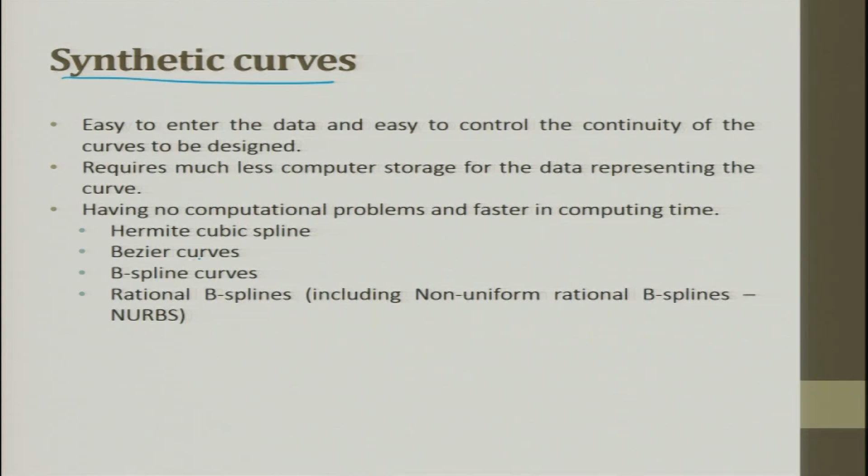Having no computational problem and being faster in computing time, we have the Hermite cubic spline, Bezier curve, B-spline, and rational B-spline curves coming into existence.

Hermite cubic spline is a more general form of curve that can be defined through a set of vertices points. This can be represented by a set of vertices points. A spline is a piecewise parametric representation, and it represents the geometry of a curve with a specified level of parametric continuity.

The moment I said cubic, it is of the third order. Each segment of the Hermite cubic spline is approximated by a parametric cubic polynomial to maintain C2 continuity. I will leave it to you to read, or I will share a reading material about C0, C1, and C2 continuity, so you can appreciate what C2 continuity means.

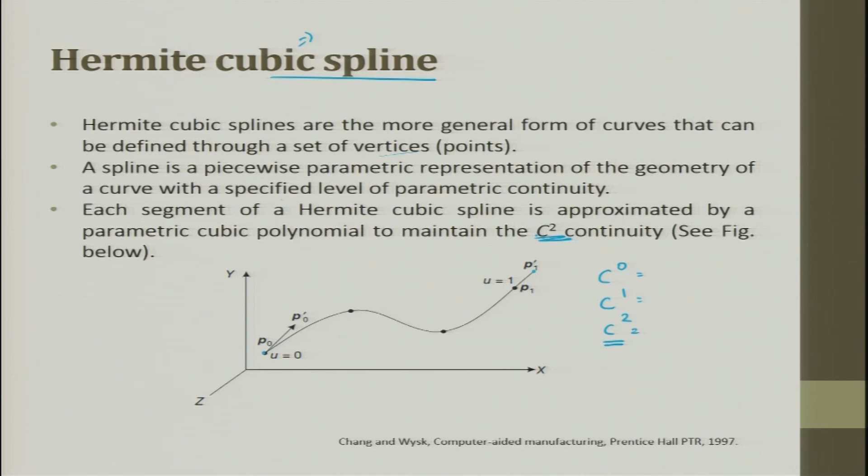The parametric equation of a Hermite cubic spline is given by P(u), which is a summation of Ci*Ui, where U takes the value from 0 to 1. In an expanded form, the same equation can be represented like this, where U is a parameter and Ci is a polynomial coefficient. If you wanted to work in a simple, algebraic, or longhand form, this is how we take it.

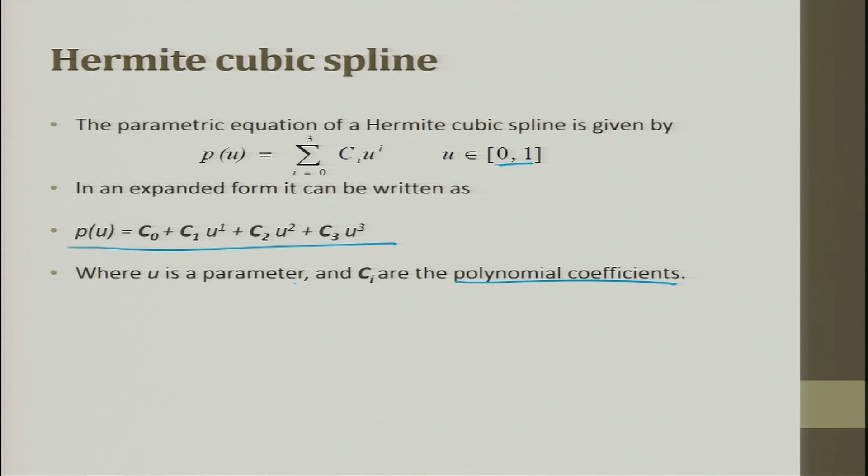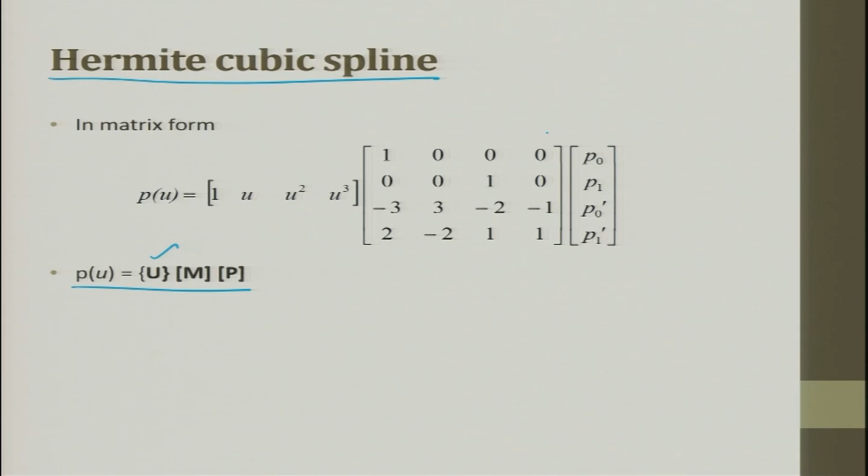But in computers, what we do is always try to convert this into matrix form. Generally the Hermite cubic spline is expressed in matrices, where 1, u, u square, u cube are the u values taken, this is the coefficient Cij, and these are the points.

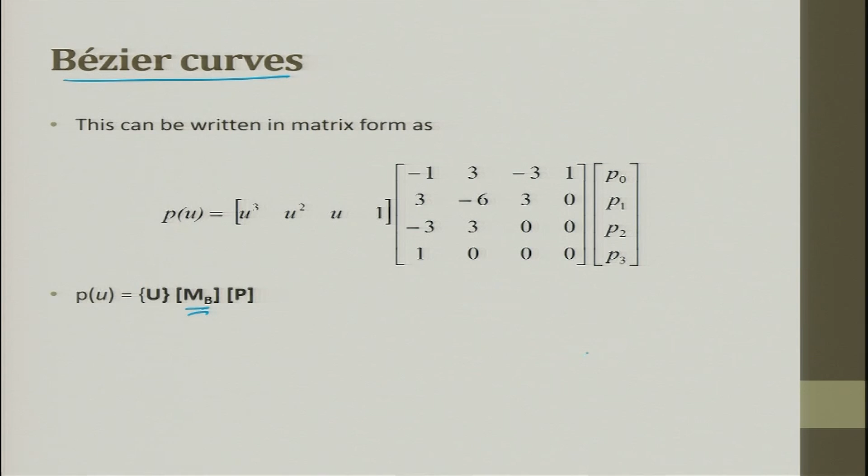In Bezier, what happens is you can express the same thing in matrix form. You can see here the Bezier matrix, these are the points, and these are the u values which are there.

Bezier curve properties: the Bezier curve passes through the first and last control point while maintaining proximity to the intermediate control points. As such, the entire Bezier curve lies in the interior of the convex hull of the control points—this is what we study in mathematics as concave and convex hull. If a control point is moved, the entire curve moves. Being a polynomial function, Bezier curves are easily computed and infinitely differentiable.

You can split the curve. If the control points of the Bezier curve are transformed, the curve moves to the corresponding new coordinate frame without changing its shape.

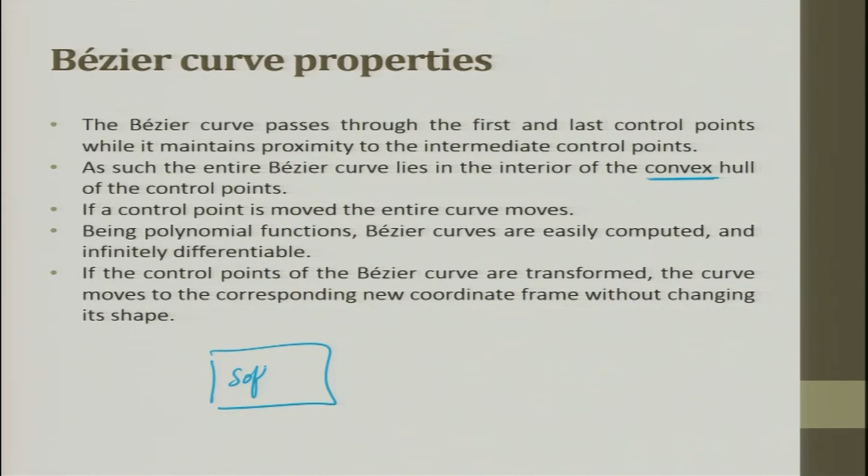This gives you the freedom of transferring it from one software to another without any difficulty. Or you have a user coordinate system and a world coordinate system—from the world you go to a user coordinate system, from one user coordinate system you go to another. The object whatever you have created will be shifted without any deformation or change.

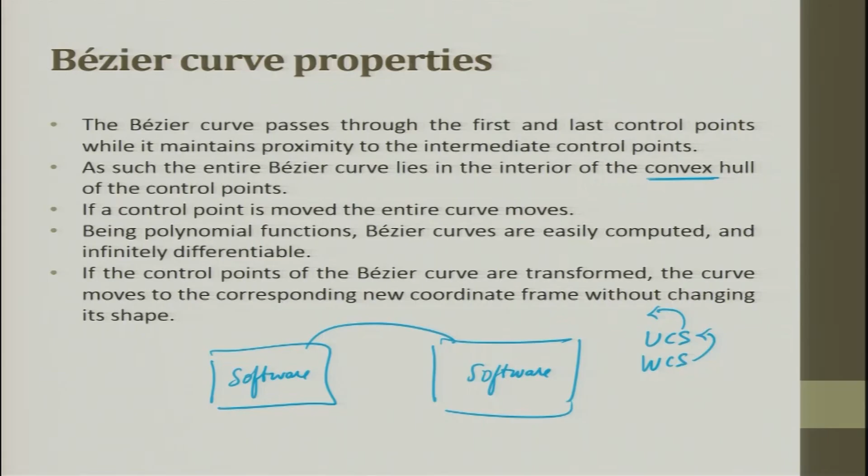B-spline can be of any degree, but in computer graphics a degree of 2 or 3 is generally found to be sufficient. You can go to the nth degree, but you will have more data, and when you have more data you will also have more errors coming here and there. So it is better to stop with 2 and 3, which also makes it computationally a little easier.

The B-spline curve has the flexibility of choosing the degree of the curve irrespective of the number of control points. With 4 control points, it is possible to get a cubic Bezier curve, while with a B-spline curve one can get a linear, quadratic, or cubic curve. A B-spline can also use the basis function or blending function in the equation to arrive at this form.

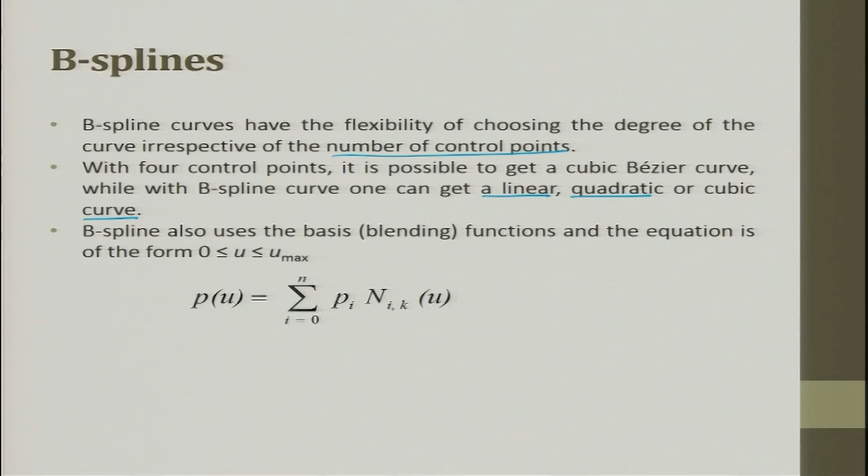The B-spline properties. The plotting of a B-spline curve is done by varying the parameter u over a range of knot values. The knot vector adds flexibility to the curve and provides better control of its shape.

The partitioning of unity for any knot span ui and ui plus 1 gives you this. The positivity is this value. This is how it is represented.

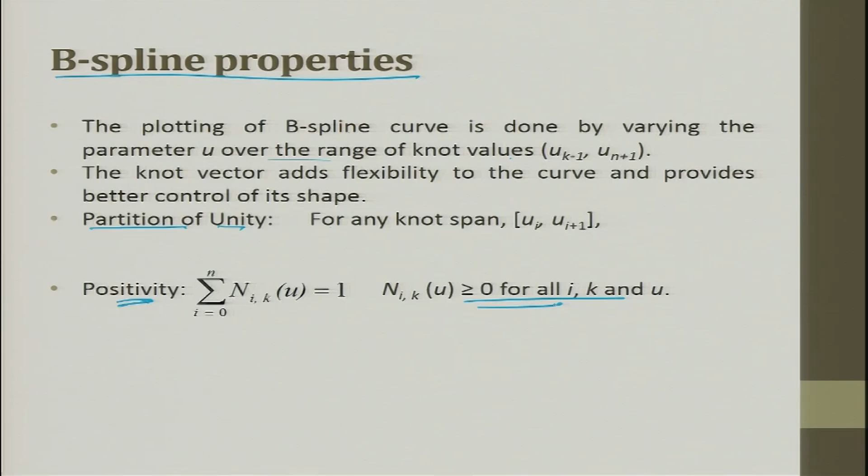The curve follows the shape of the control points and lies in the convex hull of the control points. The entire B-spline curve can be affinely transformed by transforming the control points and redrawing the curve from the transformed points. B-spline exhibits a lot of local control which is not there in Bezier.

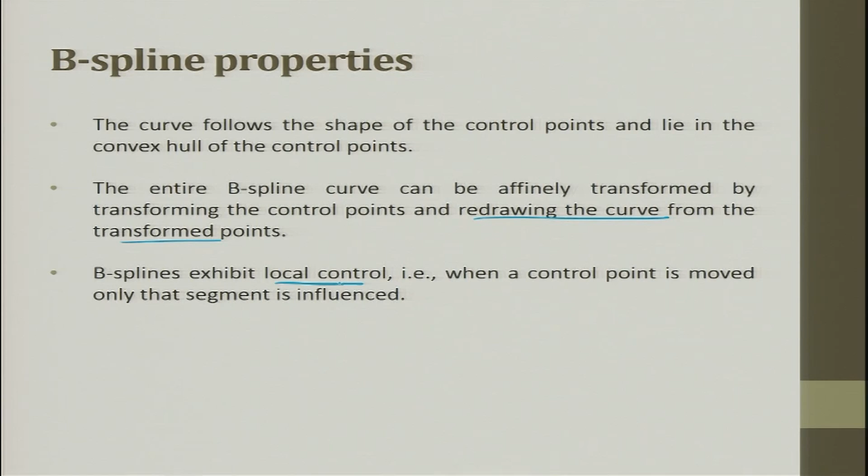The B-spline properties for CAD. The local control can be achieved by changing the position of the control points. You are now getting into fragmenting the curve and moving each individual fragment.

The B-spline curve tightens by increasing its degree. As the degree of the B-spline is lowered, it becomes closer to the control polygon.

If k is equal to n plus 1, then the resulting B-spline curve is a Bezier curve. If k is n plus 1, then the resulting B-spline is a Bezier. If the B-spline curve is contained within a convex hull of its control points, then this is very important.

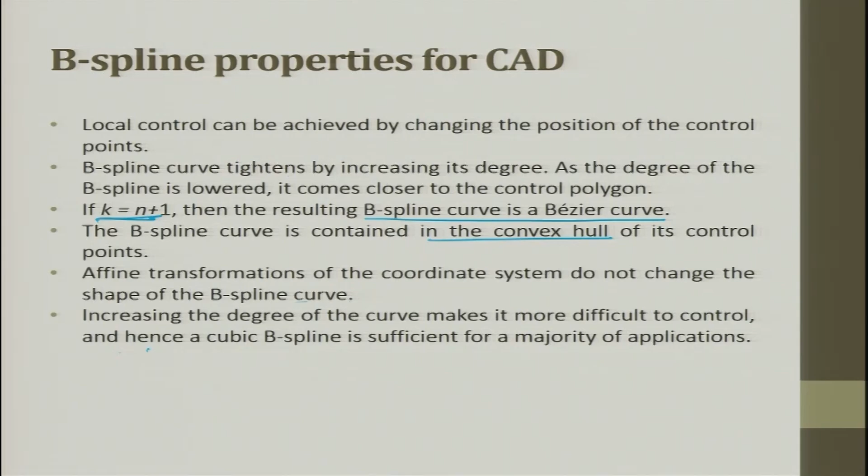Affine transformation of the coordinate system does not change the shape of a B-spline curve. Increasing the degree of the curve makes it difficult to control, hence cubic B-spline is sufficient enough to do the majority of applications. So now what is happening?

We found out that B-spline also has some difficulty. In order to get out of the difficulty, we went to rational curves. A rational curve utilizes the algebraic ratio of two polynomials. They are important in CAD because of their invariance when geometric transformations are applied.

This point is very, very important. This brings a difference, or the advantage of rational curves over B-spline. Rational curves get this advantage.

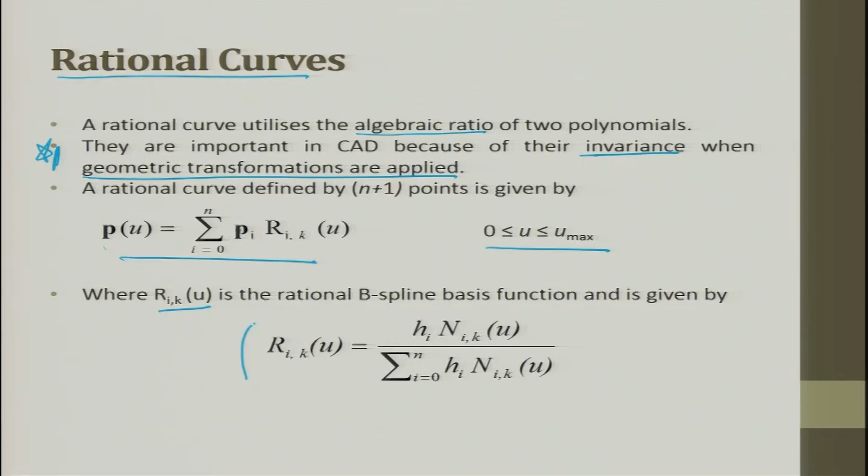The rational curves defined by n plus 1 points is given by P(u) in this form, where u takes a value between u max, where R ik is a rational B-spline basis function, and it is given by this function.

The uniform cubic B-splines are curves with the parametric intervals defined at equal length. The most common scheme used in all CAD systems is the non-uniform rational B-spline, allowing a non-uniform knot vector.

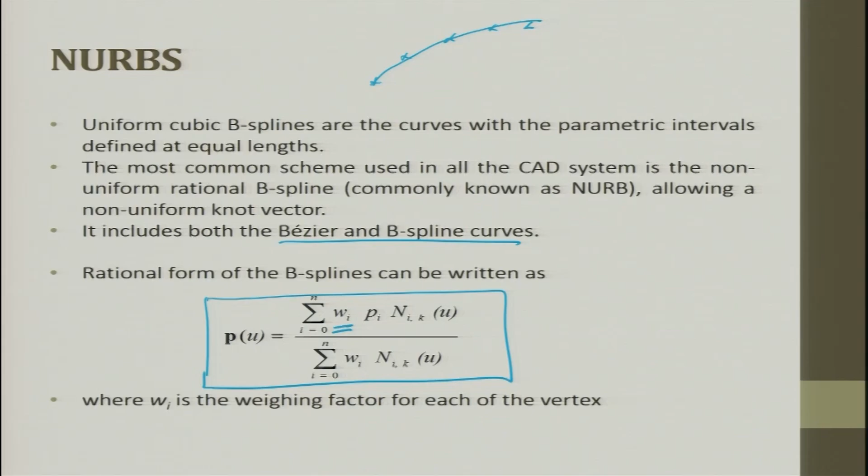It includes both Bezier and B-spline in NURBS. So the rational form of B-spline can be written in this form, where W are the weightages. So it gives you more freedom for locally changing the curves.

NURBS have all B-spline surface abilities. In addition, they overcome the limitation of B-spline surfaces by associating each control point with a weight. Uniform representation of a large variety of curves and surfaces can be done by using NURBS.

NURBS are invariant during geometric transformation as well as projections. NURBS is flexible for designing a large variety of shapes by manipulating the control points and the weights.

The weights in the NURBS data structure determine the amount of surface deflection towards and away from the control points. It makes it possible to create curves that are true conic sections.

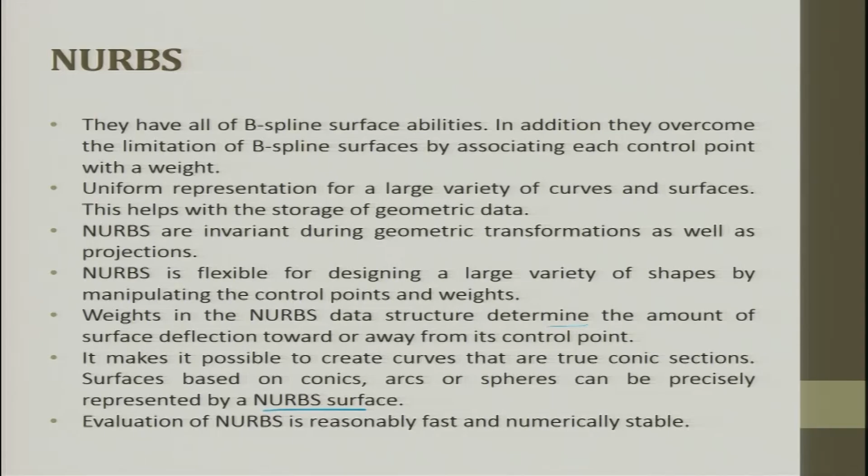Surfaces based on conics, arcs and spheres can be precisely represented by NURBS. So more and more flexibility is given for the curves such that you can try to make it free form curves. So the evaluation of NURBS is reasonably faster and numerically stable.

A number of facilities available in NURBS, such as knot insertion, refinement, removal, degree elevation, and splitting, make it more and more flexible through the design process.

NURB surfaces can be incorporated into existing solid models by stitching the NURB surface to a solid. So if you want to add a patch to the solid surface, it is possible.

Reverse engineering is heavily dependent on NURBS, wherein you have a point cloud data.

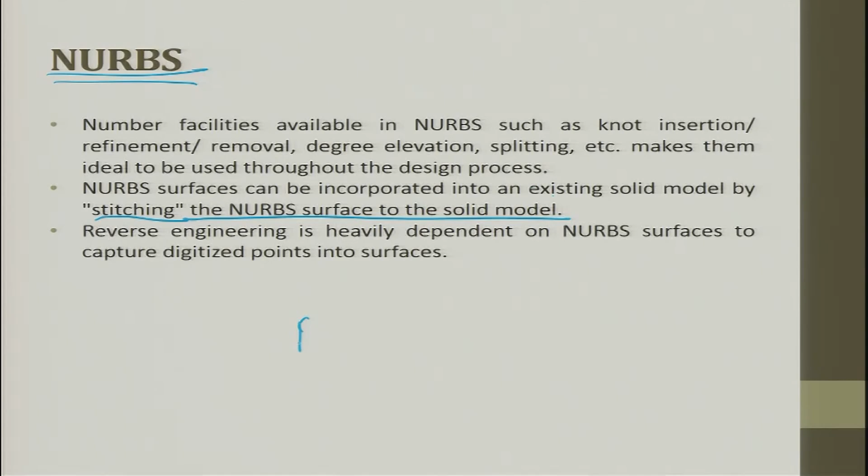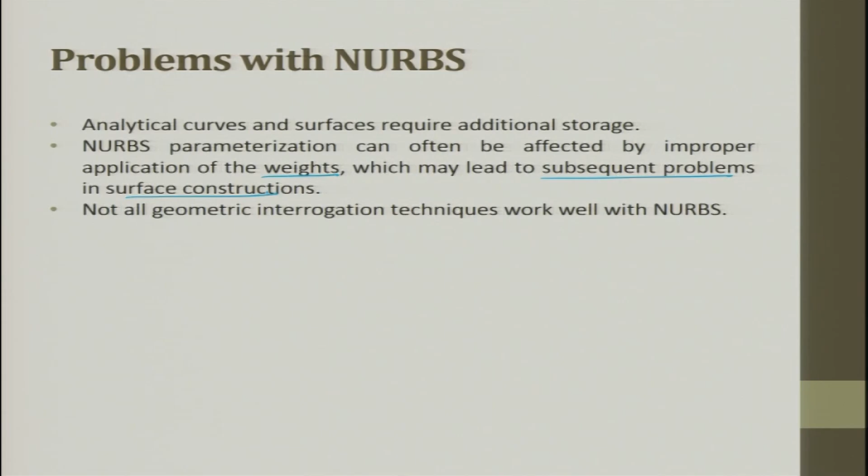The problem with NURBS is that analytical curves and surfaces require additional storage. NURBS parameterization can often be affected by improper application of weightages, which can lead to subsequent problems in surface construction. Not all geometric interrogation techniques work very well with NURBS, so NURBS also has its own difficulties.

When we talk about solids, all these things we discussed were 2D synthetic curves. When we talk about solid models, there are 6 different varieties. The most common one is boundary representation.

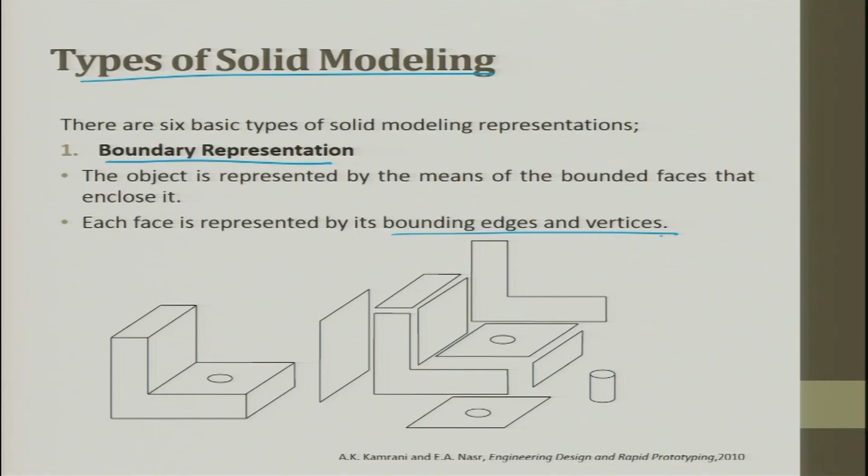The solid is divided into several boundaries, and each boundary is stored. The object is represented by means of a bounded face that is enclosed. This solid is bound by each boundary, and when you want to do fluid analysis, boundary representation is very important. Each face is represented by its bounding edges and vertices, so an object is split into several boundaries.

Next is constructive solid geometry, which we discussed. It is the representation by an order tree following a Boolean operation, through which you try to get the solid model. Non-terminal nodes represent Boolean operations such as regularized union, intersection or difference, while the terminal nodes represent a primitive solid and the transformation data.

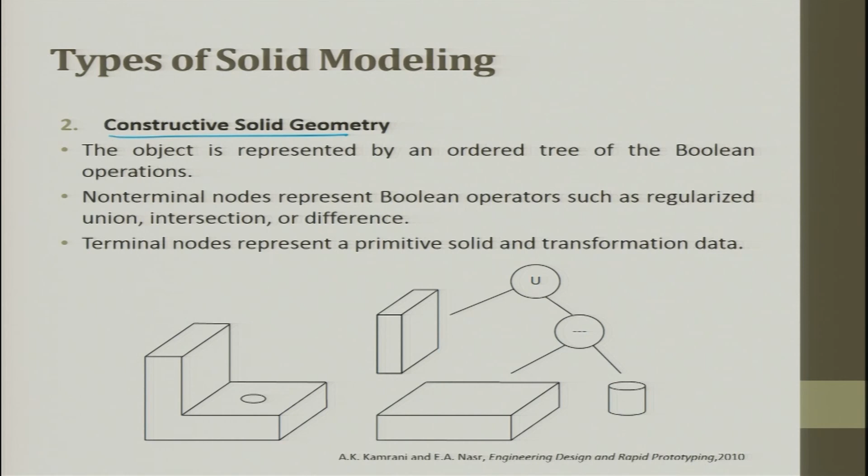The solid can be drawn through constructive solid geometry, but it is not a unique way. There are several ways to use Boolean operations to represent a solid. The third method is cell decomposition.

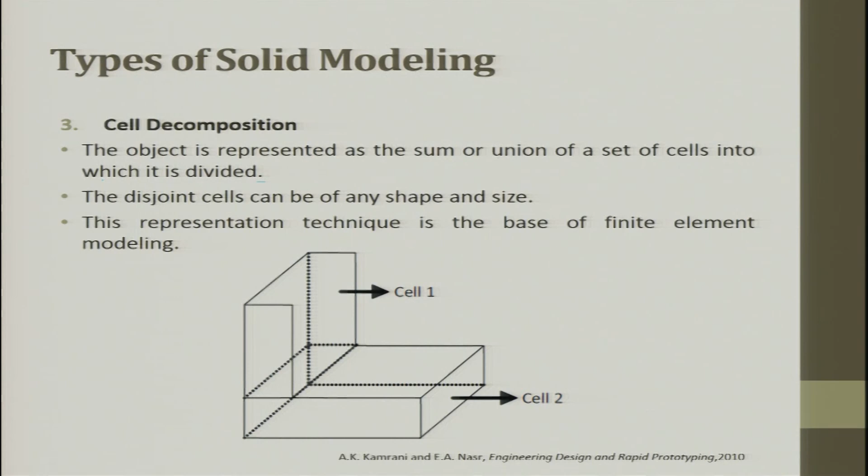The object is represented as a sum or union of a set of cells into which it is divided. Each disjoint cell can be of any shape and size. This representing technique is the base of finite element modeling, so cells used in finite element analysis mean the cell decomposition method is also exhaustively used.

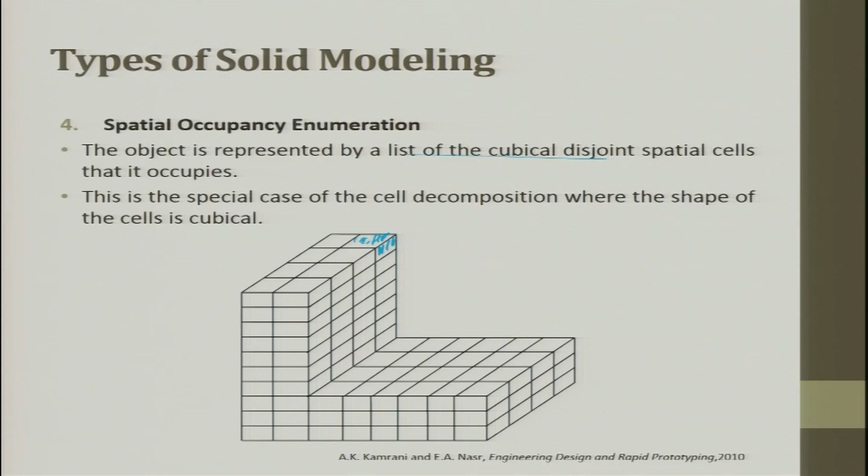Spatial occupancy enumeration represents the object by a list of cubical disjoint spaces. This is a special case of cell decomposition, where the shape of the cell is cuboidal, though you can also have other shapes. This way of representing a solid is called spatial occupancy.

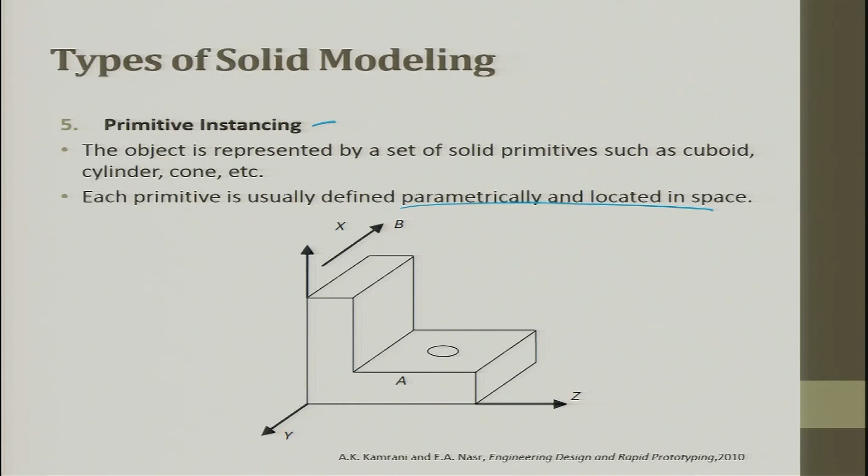Then there is primitive instancing. The object is represented by a set of solid primitives such as cuboids, cylinders, cones, etc. Each primitive is usually defined parametrically and located in space. This becomes easier since representing a cube in parametric form is easy - I take a primitive with respect to parametric form, and then join it to get a shape.

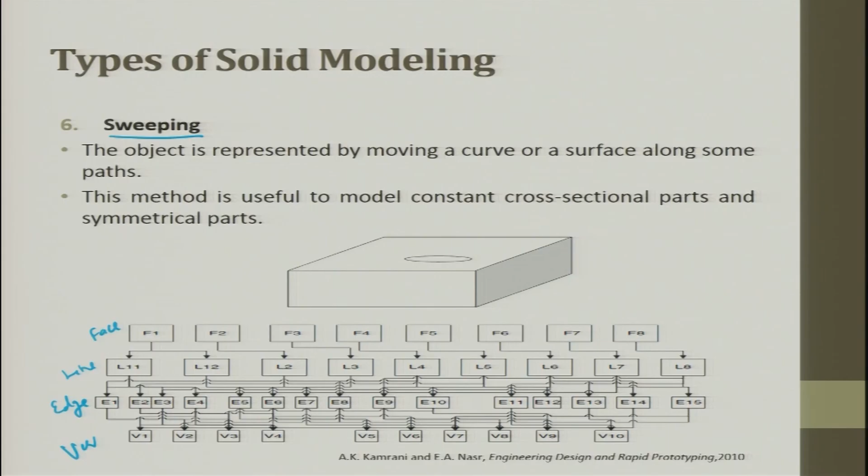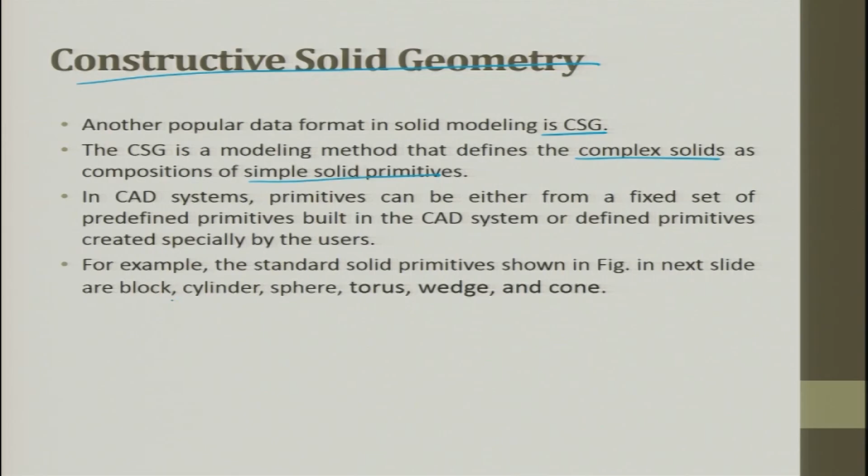So all these 6 methods are used to represent a solid. Constructive solid geometry, otherwise called CSG, is a modeling method that defines complex solid shapes as a composition of simple solid primitives, which were already discussed in the previous lectures. I have also listed them out here.

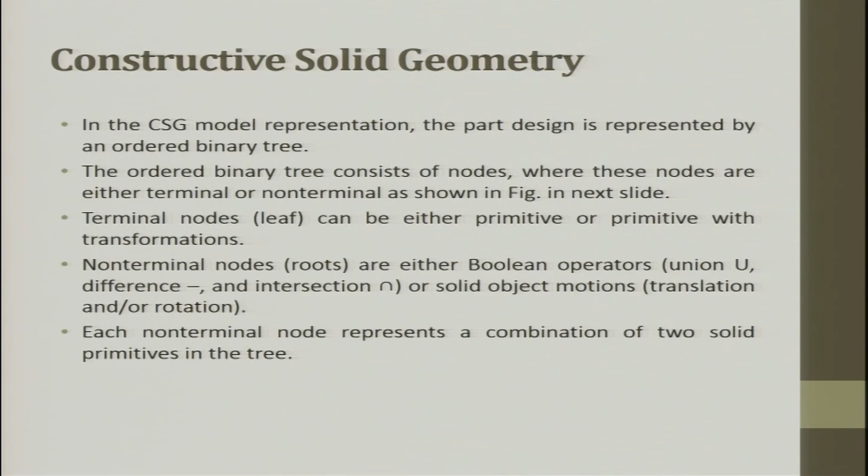The terminal nodes can be either a primitive or a primitive with transformation. Non-terminal nodes are either a Boolean operation or a solid object motion. So each non-terminal node represents a combination of two solid primitives in trees.

The last one is feature recognition and design. Feature recognition involves the identification and grouping of feature entities through a geometric model. Such post-definition of features can be done interactively or automatically. As soon as the CAD model is drawn, the feature extraction is done - identifying entities are extracted from the model, and additional engineering information such as tolerance and non-geometric attributes are then associated with the feature entity.

So it quickly goes, there is a template, it identifies what features are the same, and then starts processing. Suppose hair is there, so all predefined features are already available. So it splits the full CAD model once it sees it, divides it into several features. Each feature recognition is one step, and extraction is two. Recognition and extraction go back and forth. Recognition is based on features like eye, nose, mouth, hair.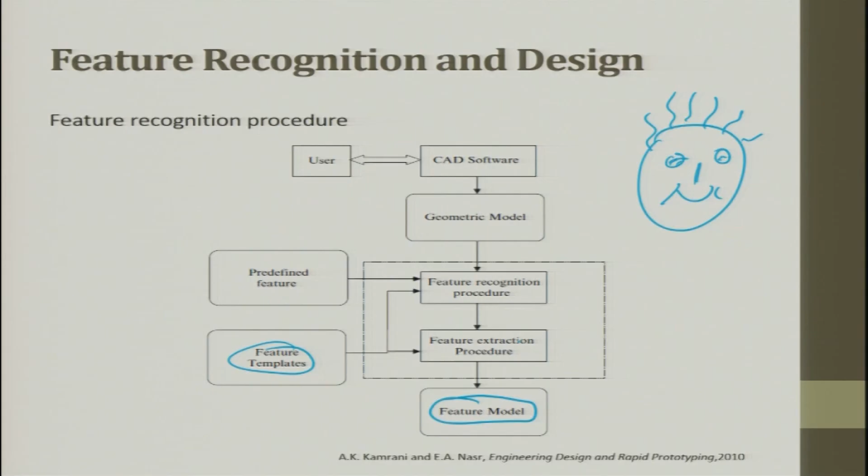Template feature extraction procedures are there, so we do it, and finally we get a feature model. The feature based model, or design by feature, uses 2D or 3D features as design primitives on the product model. The use of features provides a more natural interface between design and solid modeling. In mechanical design, for example, a designer can work directly with high level entities such as a pocket, rather than associated low level entities in which vertices and edges form a pocket.

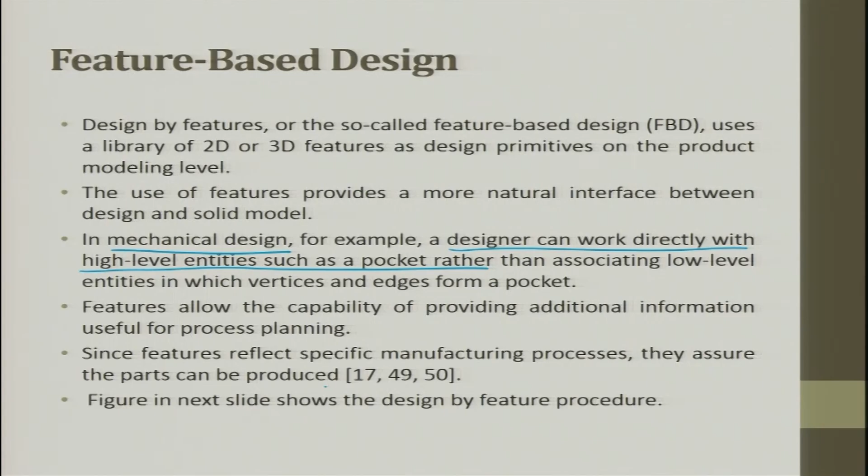So in mechanical design, the designer can work directly with the high level entity as a pocket, in terms of a face rather than curves and lines. The feature allows the capability of providing additional information useful for planning. Since features reflect specific manufacturing processes, they assure the part can be produced. So in feature based design, you have a CAD software, geometric model, and feature model. You pick features from the feature library, which is connected to a process library, to see what is going on.

The integration of design by feature and feature recognition is applicable for design and manufacturing integration. The user can create a context dependent representation that is specific and informative enough to satisfy the required application. During the recognition process, the user builds the geometric model of a part that is successively mapped into the feature based model. On the other hand, intersecting features are very important.

Intersecting features are present on the conventional representation and not generated by the feature operation. For example, intersecting features - I have a cup, I have an ear or handle. This is an intersecting feature, the handle getting integrated, represented in the conventional representation and not generated in feature operation. The algorithms needed to extract both intersecting and interacting features, by operating on different input representations, are available today. So with this, we try to do feature interaction and feature extraction, and then get the 3D object.

The feature interaction problem can be treated as a problem of feature relationship. What is the relationship with respect to an eye and a face? That's the relationship problem. There is no existing feature recognition system that could recognize all 3D solid primitives as of today. The remainder of this section defines the problem of interacting features with an example. Interacting features are very common in manufacturing design objects.

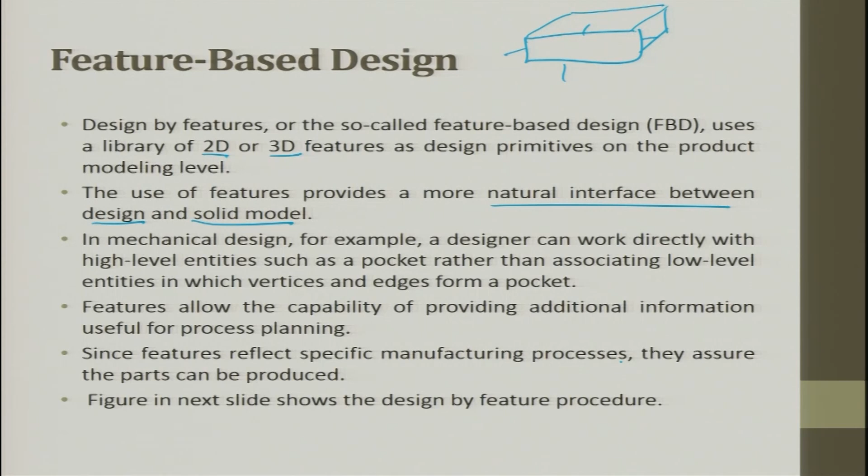So when we try to do a CAD solid model and leave it for the CAM software to decide, it quickly recognizes individual features and then extracts and links them with the process parameters. Since features reflect specific manufacturing processes, they assure the part can be produced. So this is how the procedure works.

So you have a CAD software wherein you do geometric modeling, and you have a feature modeler. This performs extraction in the feature modeling process, and then communicates with the user, the designer. So the CAD software has these two parts - the feature modeler does the extraction, and this feature modeler always tries to get information from the feature library, which is in turn attached to a process library.

Just by knowing the feature, you see now the process is pulled down and you try to get it. So this is a simple schematic diagram of feature based design.

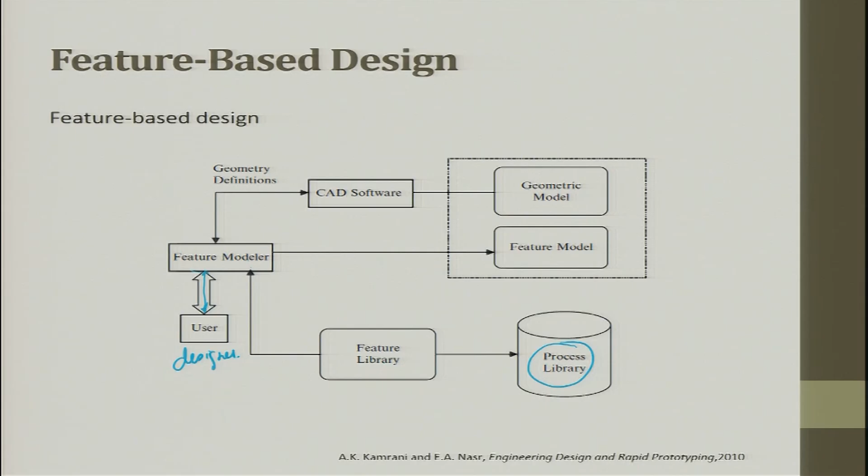The integration of design by feature and feature recognition is applicable for design and manufacturing integration today. Design by feature is the designer's view, feature recognition application is the manufacturing view.

A user can create a context dependent representation that is specific and informative enough to satisfy the requirement of the application. In the recognition process, the user builds the geometric model of a part that is successively mapped into the feature based model. Feature recognition is also used to directly recognize features from the CAD model.

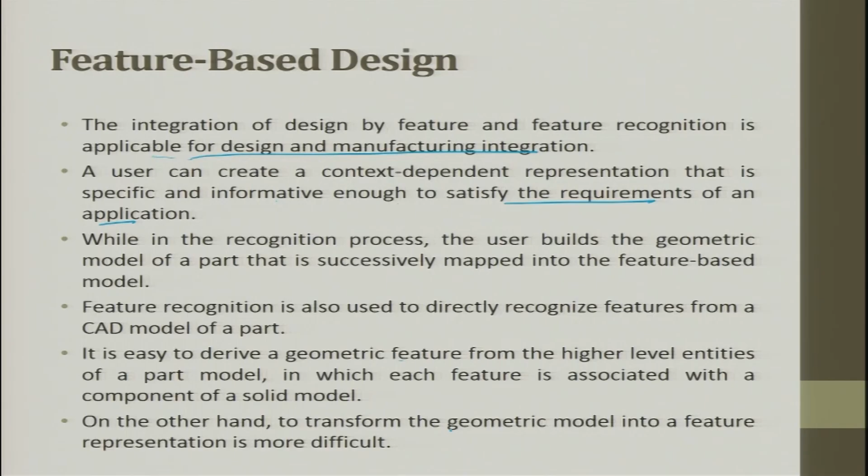It is easy to derive a geometric feature from higher level entities of a part model, in which each feature is associated with a component of a solid model. On the other hand, transforming the geometric model into a feature representation is very difficult.

Intersecting features are represented on conventional representations and not generated by feature operation. Intersecting features are always a challenge.

For example, you have a cylinder, you have a plane that cuts it, and then you get an ellipse. Now if this ellipse is attached to some other cylinder, then it is an intersecting feature, if it goes like this, a cylinder with another cylinder going.

Intersecting features are represented on conventional representation and not generated by feature operation. There are several algorithms used today for extracting both intersecting and interacting features.

The feature interaction also takes a different meaning in process planning. If the set of machining features is not machined in the correct sequence, one feature can interact with another feature already in the part, thus generating an incorrect part.

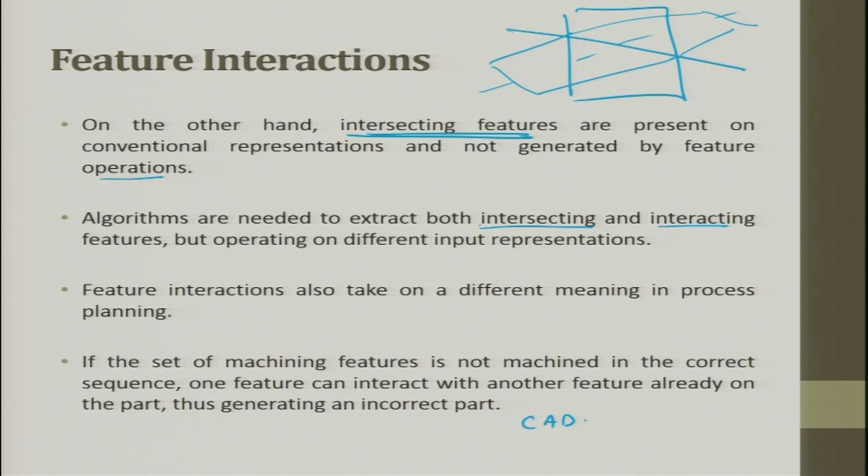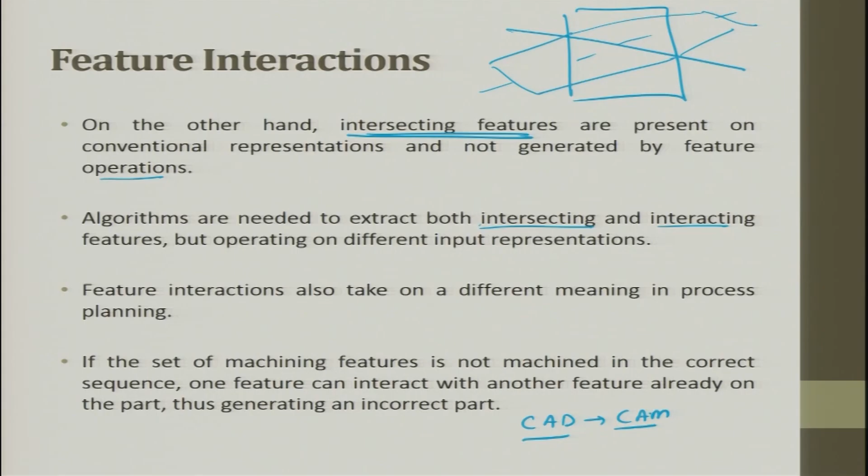So now what are we talking about? CAD to CAM link we are talking about. All these things are for rapid manufacturing. Just doing CAD alone does not matter for manufacturing. Doing CAD and transforming the data to CAM automatically needs all these feature recognition models.

The feature interaction problem can be treated as a problem of feature relationship. There is no existing feature recognition system that could recognize all types of 3D solid feature primitives and their various interacting combinations. The remainder of this section defines the problem of intersecting features with an example.

The interacting features are very common on manufacturing design objects.

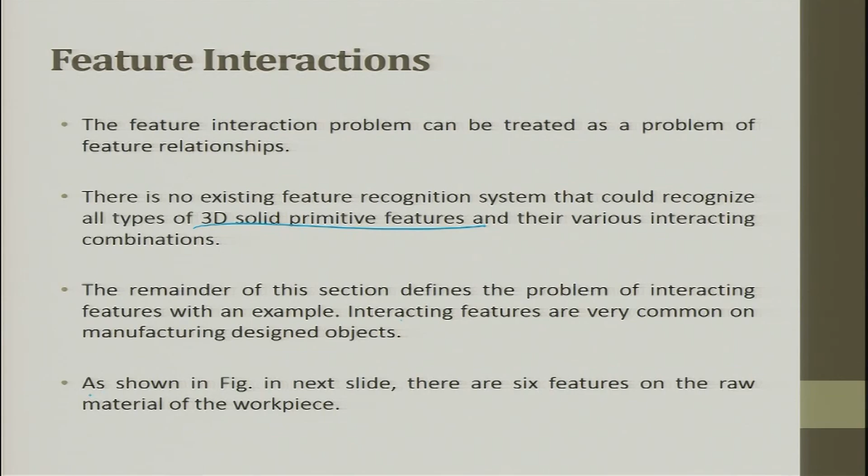In this lecture, in the entire CAD discussion, we saw the function of CAD-CAM, the CAD-CAM standards, the function of geometric modeling, the importance of synthetic curves like Bezier, B-spline, NURBS, then we defined constructive solid geometry, constraint based modeling, explained CSG, then feature recognition, design by feature and its procedure, and what feature interaction is.

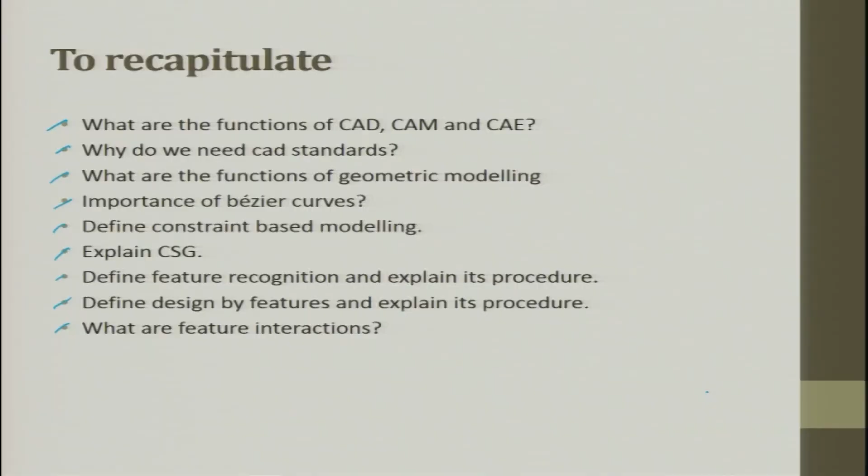So these are the topics we saw in this lecture of CAD. This is very important. If CAD does not exist, CAM does not exist.

If CAM does not exist, rapid manufacturing does not exist. In CAM comes RP also, CNC machining, CAE, CAQ, whatever you say. All these things come from CAD.

So if you know to represent CAD properly, then the next step is taken care of. In CAD, you have simple geometric and complex geometric forms. You have analytical surfaces and freeform or synthetic surfaces. In analytical surfaces, parametric forms can be done.

In synthetic surfaces, you have to work on features like curves. These curves are B-spline, Bezier, NURBS - all these representations you have to use for developing a freeform surface using synthetic curves. Until now we were only talking about a single curve. Suppose you have a big curve and we are discretizing it into several small curves, and the radius of each curve is changing. Then the problem of first getting continuity, then smoothness of the continuity, and control points in each curve is a challenge.

Then we took it to the next level, feature recognition. Today the talk of the town is feature recognition through CAD. One is extraction of details, the other is interaction, or when there is an intersection of details - then how do you extract those features? This is what we saw in this lecture.